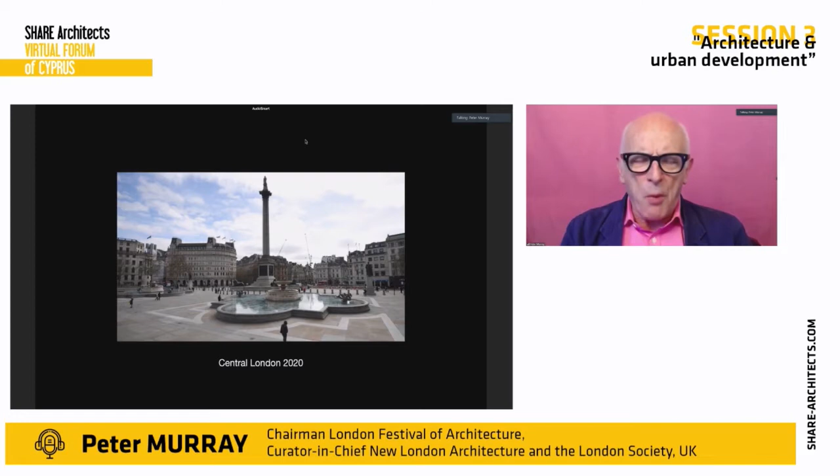Sorry about that. So I start with this view of central London during the lockdown of the COVID crisis, obviously empty like many cities around the world. The footfall in central London dropped to about 5% of its normal footfall during the lockdown, and this was bad news for shops, museums, art galleries, everything that's an important part of making a central city area.

I need to go back. Yes, right, okay, I've got this.

So we have in London a fairly extensive underground public transport system, but of course during COVID-19 this has been very empty, not really working, because people are nervous of being within confined environments and therefore not going into the center as one would hope.

So how do we get out of this situation? What are the solutions to it? This is one of the key proposals which have been made, supported by the Mayor of Paris and discussed by many commentators on cities, and supported by the Bloomberg Foundation: the idea of the ville du quart d'heure, or the 15-minute city, where everything is in close connection to where people live. They can get all their amenities in one place.

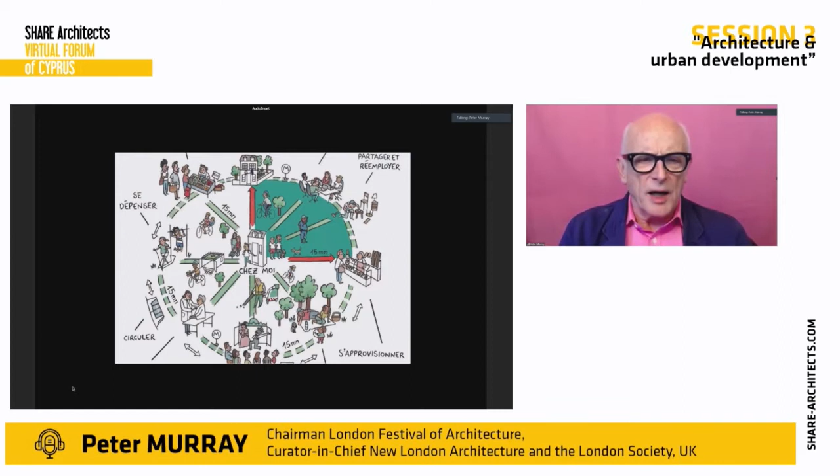It's something that is not necessarily new. The new urbanism movement also supported the idea of walking distances, easy connections into all the various facilities that people require within a local environment. But I think we have to understand that this may well work for a more suburban sort of environment, but it's not something that works in cities more generally.

Now I'd point to this exceptionally perceptive diagram by Cedric Price, probably one of England's, or the UK's, most important theoretical architects in the post-war period. He drew the ancient city, which has its protective wall around it with a dense center. Then in the 17th and 19th century you still had a dense center, with the white of the egg spreading out into suburban areas. He talked about the modern city being more like a scrambled egg. To a certain extent, that scrambled egg is the diagram for the 15-minute city, a city which is pretty well evenly spread.

Now, I'm going to talk about the evolution of London, which actually creates a naturally polycentric city, but with a strong core. That is, I think, the way we have to look at the shape of our cities, particularly those larger-scale global cities which have key areas of intensity, like New York, London, Shanghai, Paris, Berlin, cities like that. How do we retain that vital center, where people coming together of all types is really an essential part of both driving the commercial nature of those cities, but also creating them as social hubs?

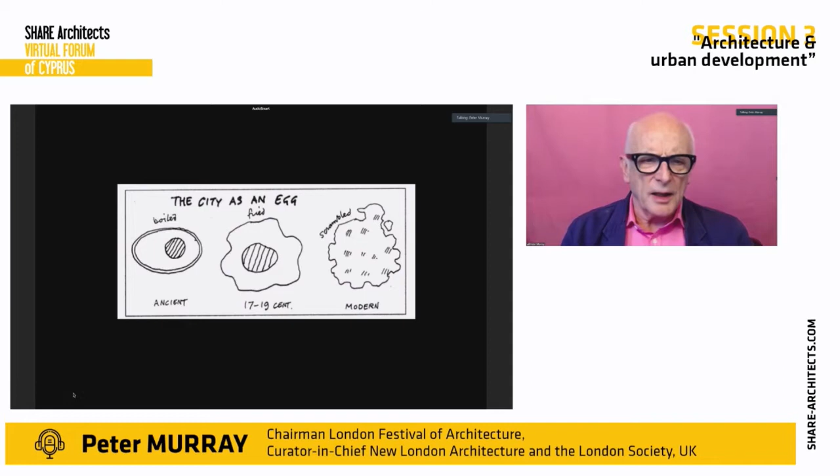This is Roman London, which the Romans arrived at about 40 AD, and they stayed in London for 400 years. They built their encampment right in the center, where today we still have our central business district.

This, of course, was typical of Cedric Price's hard-boiled egg: it had a wall around it, a dense center, and was a typical historic city.

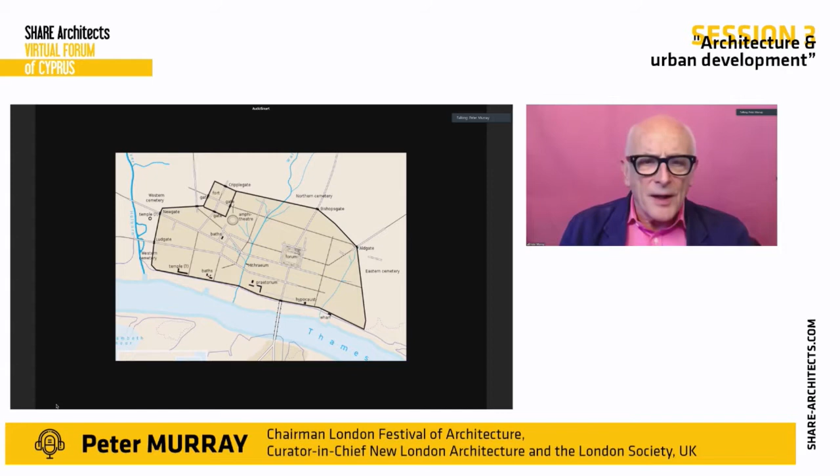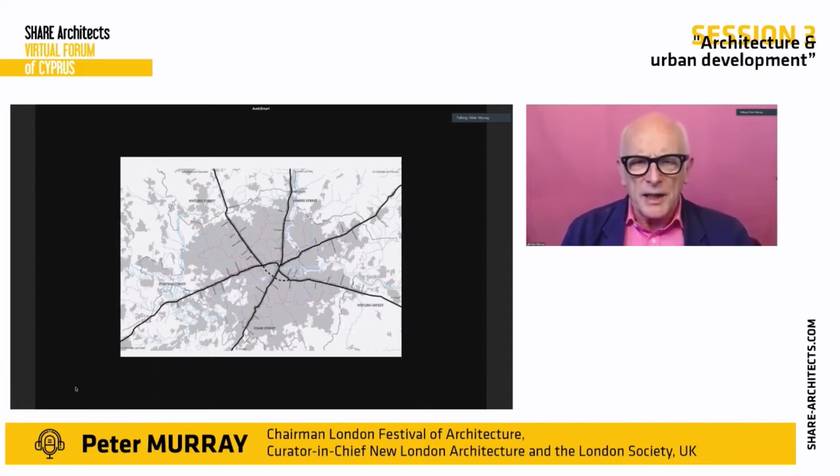The interesting thing was that as it expands, it creates roads which move out into connections to other cities and out into the countryside, creating a radial pattern of roads, a structure which has been maintained in London throughout the city's history. That radial pattern has also been copied by public transport systems, so that although there are a few cross-city rail and underground tracks, the general pattern of the city is still radial, roads going from the outside into the center.

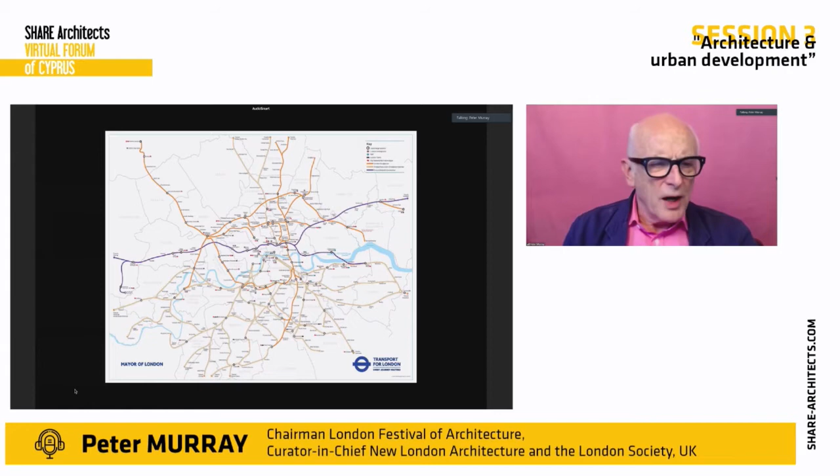That is not helpful for the idea of a polycentric city.

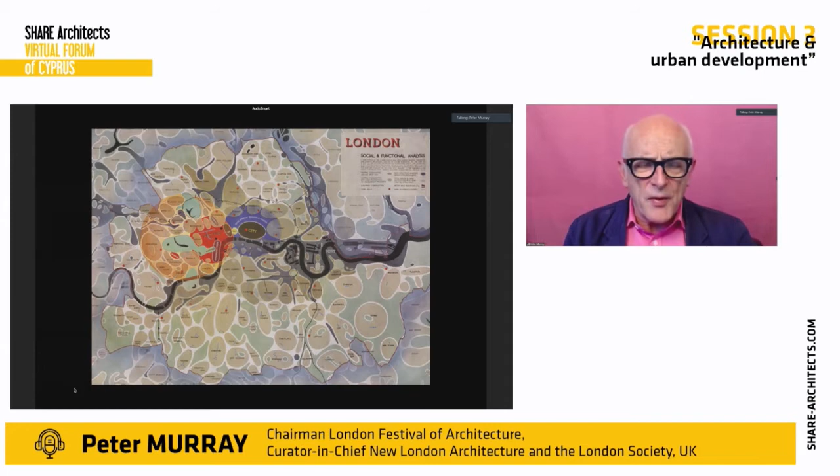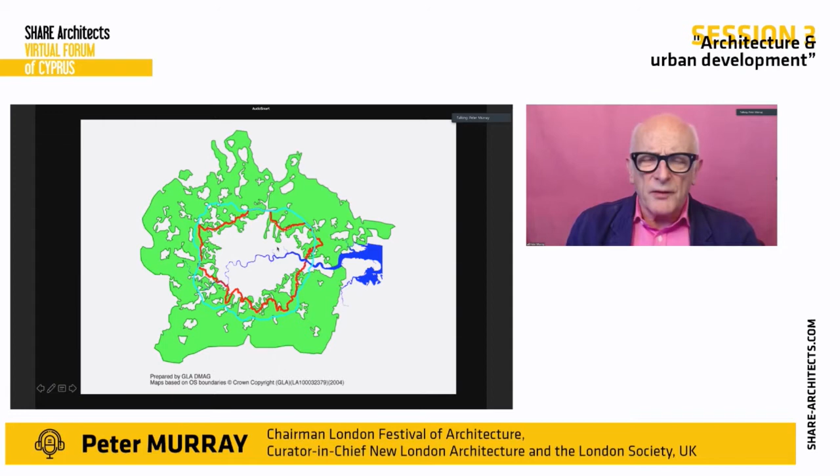One thing to bear in mind when looking at the planning of London is that it is surrounded by a green belt, created after the Second World War as well. The green belt makes it very difficult to develop within a belt of approximately 15 to 30 kilometers from the edge of the London area, marked by this red line. So it's very difficult to develop within the green area, which means developing more densely in the center.

Very interestingly, as I was saying, the main public transport movement is radial lines coming into the center from outside the city. But this data, produced from Uber taxi ride movements a couple of years ago, shows how there is a huge demand for what I call orbital movement between areas in outer London, which at the moment is badly served by public transport.

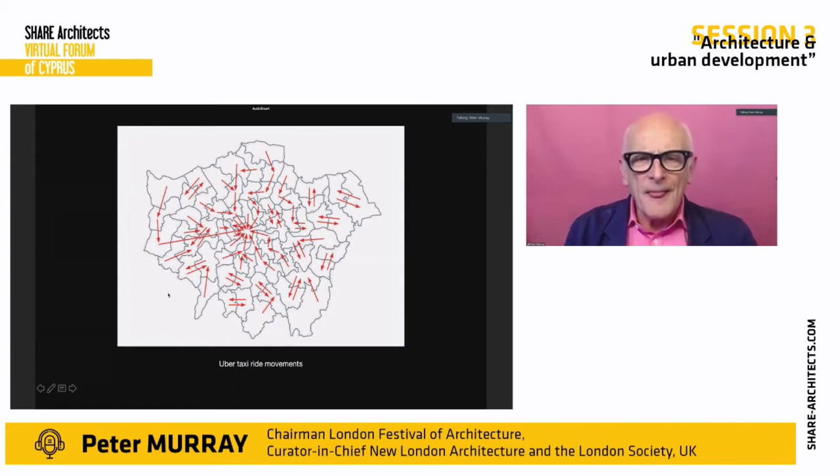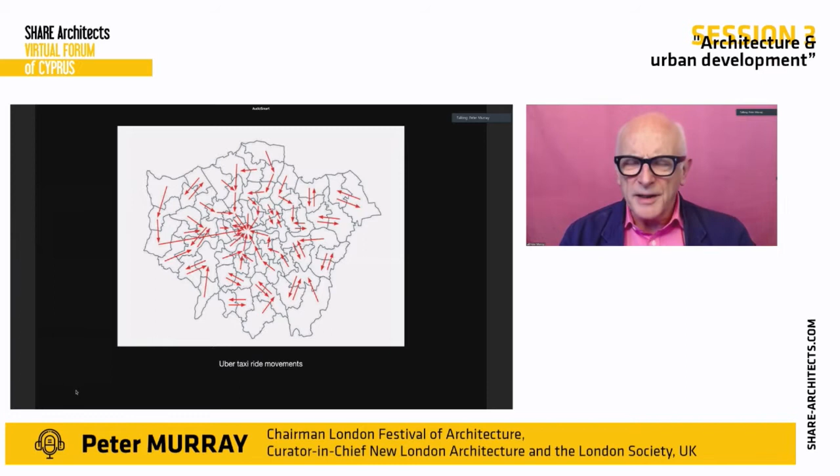Most people who move around in an orbital way have to move by car. Younger people, who are more likely to be Uber customers in outer London, clearly show from this map a huge desire to move orbitally rather than always going into the center. The ability to access relatively cheap forms of private transport shows what the desire lines are - a very interesting example of how data from digital monitoring of movements can provide ideas about patterns of how we'd want to move around the city.

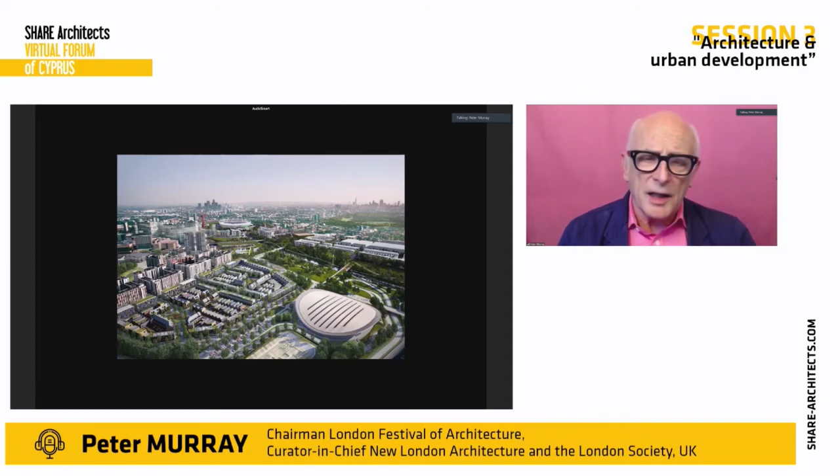Those are developed as part of the London Plan, a strategic plan written by the mayor. A lot of development takes place in what are called opportunity areas, which were previously industrial land—we call it brownfield land—and they've been redeveloped with fairly dense new housing, retail, entertainment, and culture, creating, in effect, the 15-minute city.

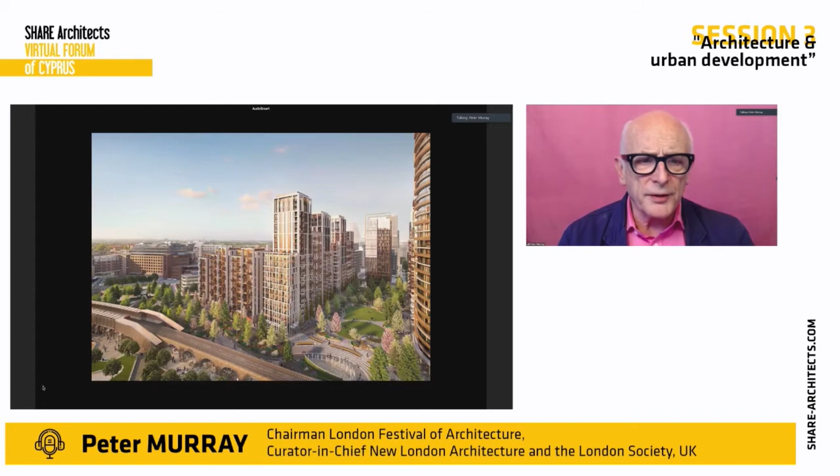Sorry, to go back to that one—I can't go backwards, I'm sorry. The previous one that I showed was of Stratford, where we had the Olympics, and that became a highly developed area. You may have also seen the image of Wembley Football Stadium; there's a new development around that as well.

As I say, these dense pockets of development have been taking place within opportunity areas, which is a key part of the London Plan. But we've also been creating changes to the way people move around the city on a smaller scale, encouraging more walking and cycling. We were doing this before COVID-19, but it has accelerated, as it has in many other cities in recent months.

We started about 5 years ago with a program called Mini Hollands. It was named Mini Holland because we wanted to show that London could be as good as cities like Amsterdam or Rotterdam, that we could follow the high cycling numbers of Dutch cities. Three test boroughs in London delivered an integrated cycling structure which improved streets and created better places for pedestrians, and they have been very successful.

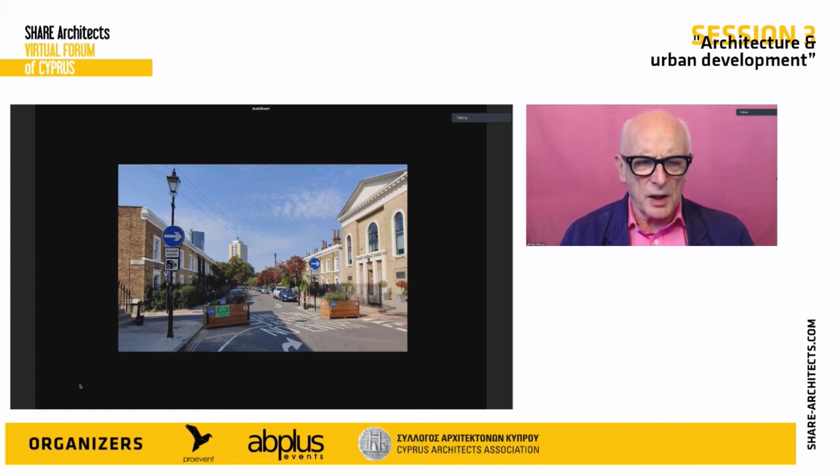So in terms of how we actually think about the design of cities, taking into account this idea that we need to have a strong central core and polycentric neighborhoods—I've used this diagram from Richard Rogers' book, The Compact City, which formed very much the basis of the first London Plan, and has driven the way that London has developed over the last 20 years.

And as you can see, this is an idea of a city district with a clear urban edge. And as I say, London has the green belt around it, which creates a clear urban edge. It has

a denser central activity zone, which is a center for business. It has also satellite environments, which can be of varying sizes. But in terms of this conversation, let's say they are 15-minute cities, and they are all well connected by public transport.

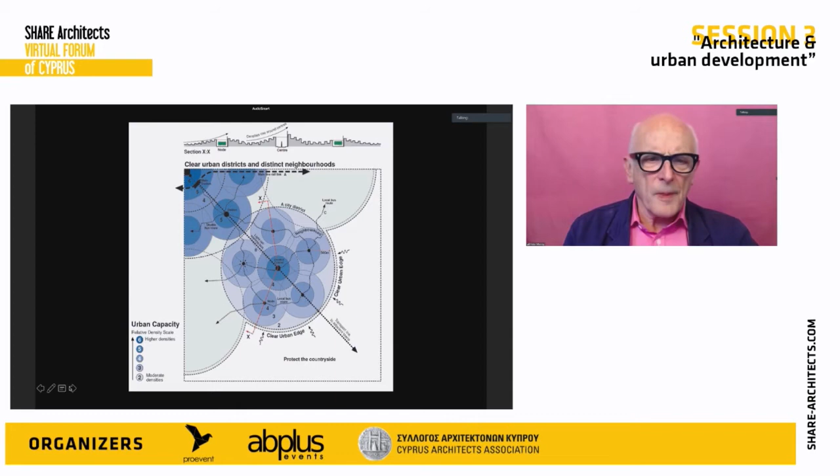And right at this moment, there is a public inquiry going on about this building. It's designed as a tourist feature, and it has a viewing platform up at the top with revolving pods that people can sit in, glass pods, which provide a very vertiginous experience as you look out over the city.

It's quite close to the Tower of London and historic areas, and a lot of the debate is about the impact it will have on those historic areas. But interestingly enough, this is supported by the planning authority in the area that it's sitting in, which is called the City of London, the central business district.

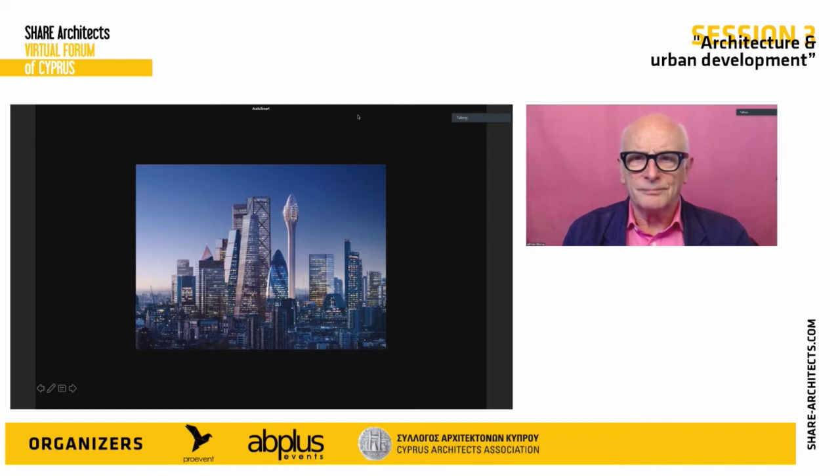Well, thank you very much, Peter, for this enlightening lecture. But just listening to your presentation, I assume that, as you said, now we are in the scrambled egg period. Where do you think we're going next?

Well, I think the problem is how long it takes, and better people than me have no idea how long it's going to take. So I just think that I hope vaccinations will change things, but I can see that we are likely most of next year to have restrictions both on movement and in the way we relate to other people.

I would say there is a medium term and a longer term issue. The medium term is, how do you actually keep the businesses going that are key to city areas, the restaurants, the shops, the bars, as well as the galleries and the museums. How do they survive during that period when their incomes are clearly impacted? Because the last thing we want is to have what happened in Detroit, where you start having empty buildings, badly maintained, empty shop units.